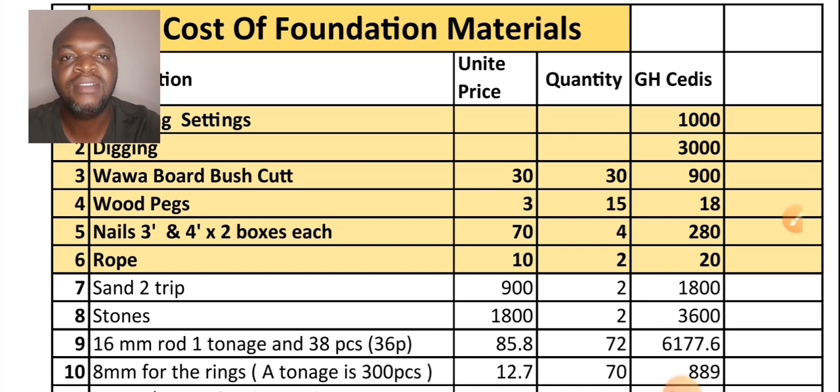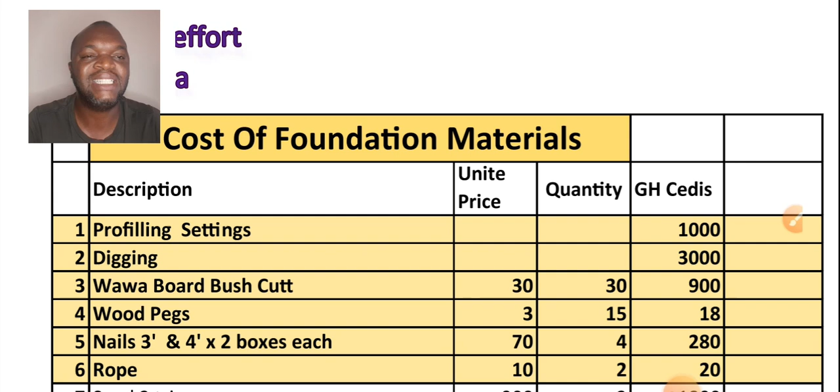In this episode, I want to guide all of us based on my last video, which I talked about the cost of foundation of a 5-bedroom house. So some of my subscribers have asked me to put it on a spreadsheet, and I did this particular one for a subscriber.

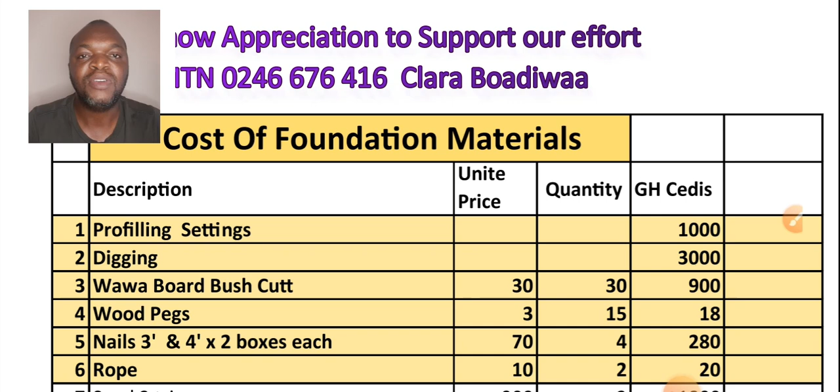So I want to share it with all of us so that if you want to build a 4-bedroom house or a 3-bedroom house or a 5-bedroom house, you can use this as a guide. Our aim is to reduce to the lowest value.

You don't just give the money as, okay, someone gives you an estimate, you say, oh let me pay. No, you have to bargain. So this is going to be our guide.

I designed this basically for a 5-bedroom house. In this 5-bedroom house, he has a big hall, a visitor's toilet, a guest room. The guest room has its own bathroom, which is all en suite. He has a kitchen, a kitchen store, and a laundry room.

And then the 4 bedrooms in addition come with their own bathroom. The master bedroom has a walk-in closet and then the shower separately. So the foundation is huge.

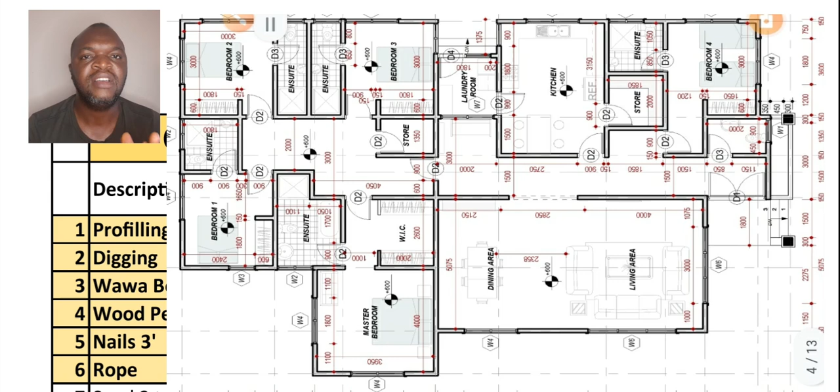In this way, we are using 2,000 blocks mostly for this foundation. Averagely, we use 1,500 to 1,700 for a standard 4-bedroom, 5-bedroom house. But when you have this laundry room, utility area, walk-in closets, and all the rooms having their own bathrooms, approximately 2,000 to 2,200 blocks will be required for such a foundation.

This also depends on how high you want to raise your structure. So here I'm staying with 2,000 blocks, depending on what the mason is doing at the site. Based on that you can add maybe 200 or 50 blocks depending on how high you want to go.

So this spreadsheet should guide all of us. Please let's go ahead and use it whenever we want to build. So this is solely for the foundation.

In this foundation we have our profiling settings. This is when the draftsman who did the drawing for you comes and demarcates all the rooms onto the land. By so doing, we get our Wawa board across the whole plot, which I showed in my last video.

Okay, yes, most people use blocks. They don't buy the Wawa boards and the pegs, but then it doesn't give accuracy, in my opinion. They use the blocks all around. They mark it with chalk, then put nails. They hit it with the nails and then put the rope on top.

But what happens if someone comes to pick the blocks away? You don't get your grid line. Grid lines are very, very important. It gives you the straightness of the building. From each grid line is about the wall, maybe the hall, the kitchen, the bathroom. They should all be straight, you understand?

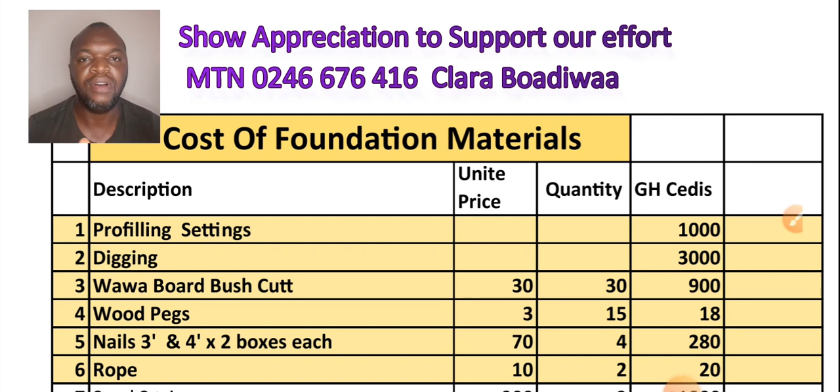So item number 4, which is the wood pegs. Then item number 5, which is the nails. Nails, we have 3 inches and 4 inches. We are buying 2 boxes each. And the cost is 70 Ghana cedis. That I can rest assured is okay, the prices are the same.

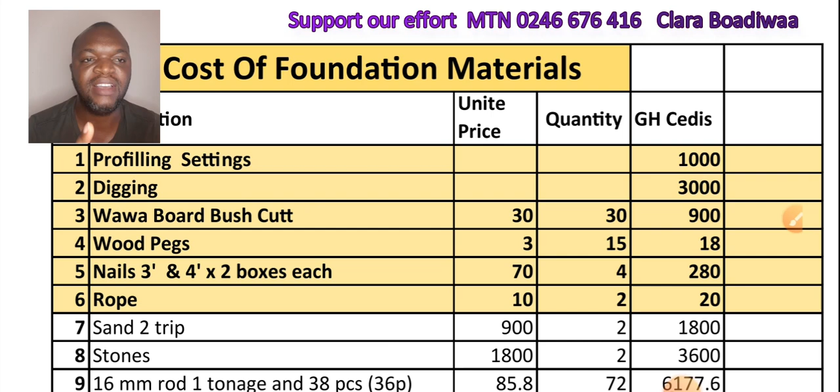Now you don't have to buy any other nails when you buy these 2 nails. Don't buy extra nails. And then you need rope.

We use rope to draw the grid line from one end to the other in order to get the straightness. Once we get the straightness, we pour a whitish powder onto the ground to demarcate all the rooms and the halls. We can use a whitewash, or we can use tiling cement, which is in a white powdered form.

Some people use sand, but sometimes you don't see it clearly. Some people use pickers for drawing the marks, because buying the tiling cement is also an additional cost. So while they draw the grid line, they can use the pickers to draw the lines and demarcate everything, and then you're good to go.

Now, from item 1 to 6, we are estimating around 5,000. We shouldn't go more than that. That should be our target. Always remember, we are trying to reduce costs. So yours is to bargain.

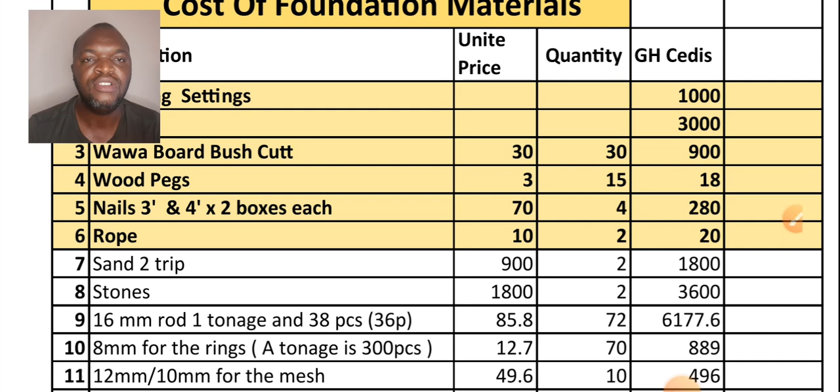In terms of the digging, when they come and say digging is 4,000, yours is to bargain, depending on how hard or soft the ground is. As I've indicated on item 2, digging should be 3,000. Some people will charge 2,500, some will charge 4,000, so item 2 you should be very careful how you bargain.

Item 1, the profiling setting, as I mentioned, you should be very vigilant. The person doing the profiling should be very well experienced. You just don't need anybody, if not your house will be crooked.

Position your house in a way that you have enough plot at the front. You can shift it to the left or right corner of the plot if it's a 70 by 100 plot. Position it such that you have enough plot. If you want a small backyard, you can leave about 4 feet at the back for a small backyard where you can place your poly tank.

You can have an out-kitchen where you cook smoky food before bringing them to the main kitchen, and a small garden if you want. Then you have ample space at the front for your flowers, your carport, and a pergola if you want. So make sure positioning of your house is very, very important.

So we're done with item 1 up to 6, which our estimate should be around 5,000. Should it go a little bit above that, you have to determine that price.

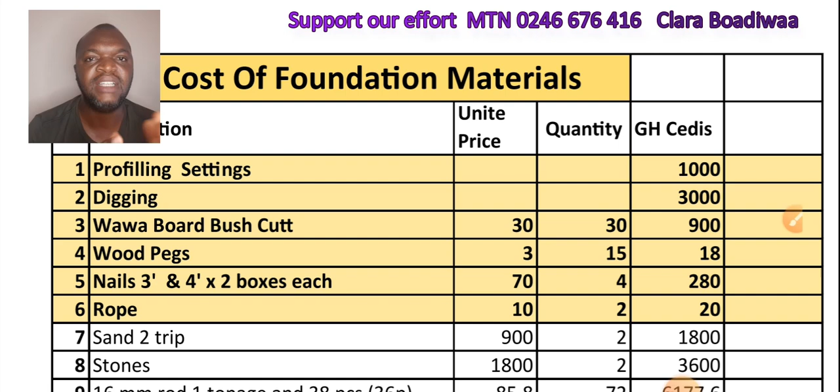Now from item 7, we need 2 trips of sand. It is very crucial. You can buy them in stages, but buying 2 trips of sand will not cause you any harm. Some people want to buy it one step at a time, but the 2 trips of sand will do justice for the foundation, because for the footing, block work, casting of the concrete pillars, and oversite concrete, you need a lot of sand.

And the stones as well, 2 trips will do entirely that. This is for a 5-bedroom house. This spreadsheet is designed for a 5-bedroom house, so if you have a 4-bedroom house, you are good to go. So item 8, we finished that.

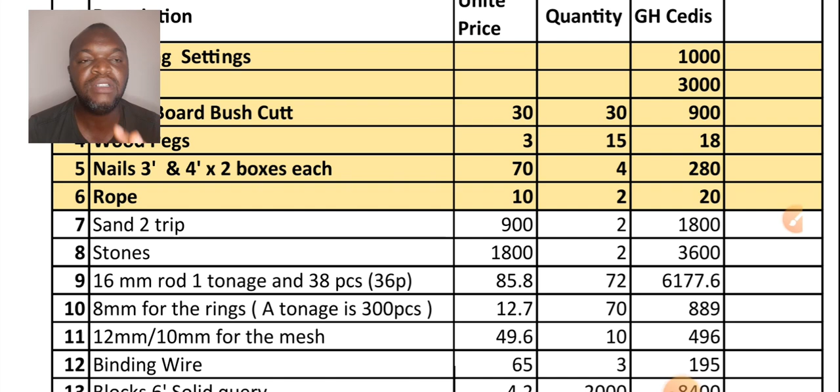Sand on item 7, some people say in their area they usually buy sand at 1,500 or 1,200, but I found that to be extravagant. That's a lot of money to buy sand at 1,500. That will make your estimate go high, but yours is to bargain to the lowest value.

Item 9, here we have 16mm rod. Based on Mr. Paul Amo's estimate or foundation plan, he has 36 pillars. So for these 36 pillars, I estimate, like I showed in my last video, we're going to take 2 full rods and cut them into 3.

And 1 full rod, when stretched wide, gives us 30 feet. So in these 30 feet, we're going to cut them into 3, giving us 10 feet, 10 feet, and 10 feet.

So you're going to be 10 feet high by 3. We need 2 of the rods, so we're going to have a total of 2 full rods cut into 3, which is 6 pieces, 10 feet high. Are you getting the point?

Yes. So based on that, I multiplied 36 by 2 - that 2 means 2 full rod. If 2 full rod gives me 1 pillar, that is the equation: 2 full rod constitute to 1 pillar.

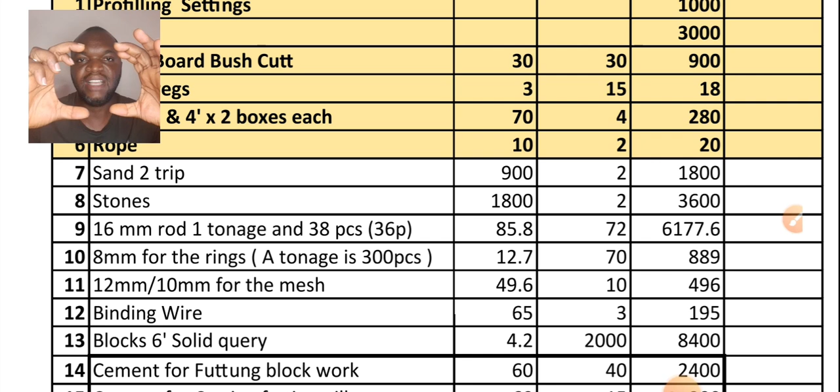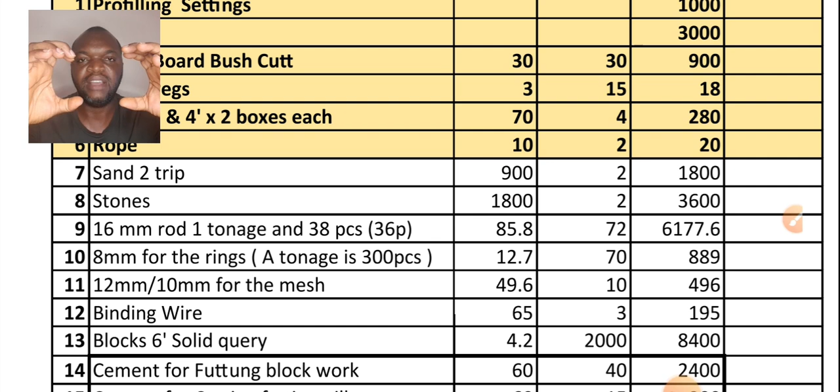Because 1 pillar I will have 10 feet - 1, 2, 3 - another 10 feet - 1, 2, 3 - which makes a stirrup. We call it a stirrup, or a ring. The ring will look like this, and I'll have 1, 2, 3 iron rods - one at the edge, in the middle, and at the edge. So the rings will look like this, with 3 rods here and 3 rods here. That gives you the stirrup.

So we need 2 full rods, one cut into 3, another cut into 3 - that gives me 1 pillar. Therefore, 36 pillars will constitute how many pieces of rods? I multiply 2 full rod by 36 pillars, and that gives me 72. So I need 72 pieces of 16mm rod.

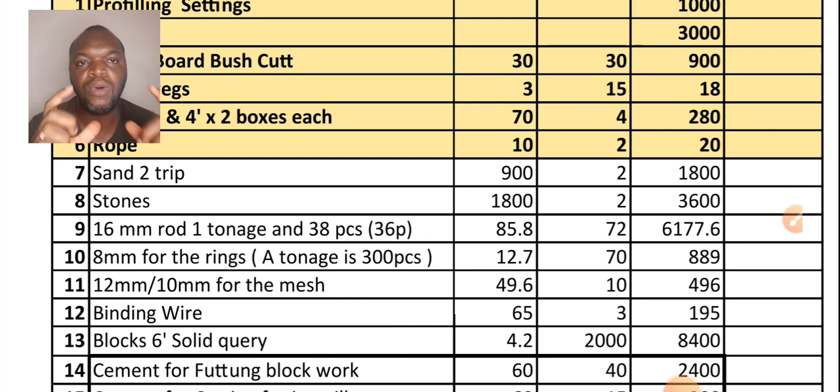We have 8mm, which we use for the rings - that's what holds those 16mm together, so that is a ring. We can buy about 70 pieces, because a ton is going about 300 pieces, so we need 70 pieces for that.

12mm for the mesh - here we are buying 10 pieces. You can buy a little bit more for your ground beams; your steel bender will tell you about that.

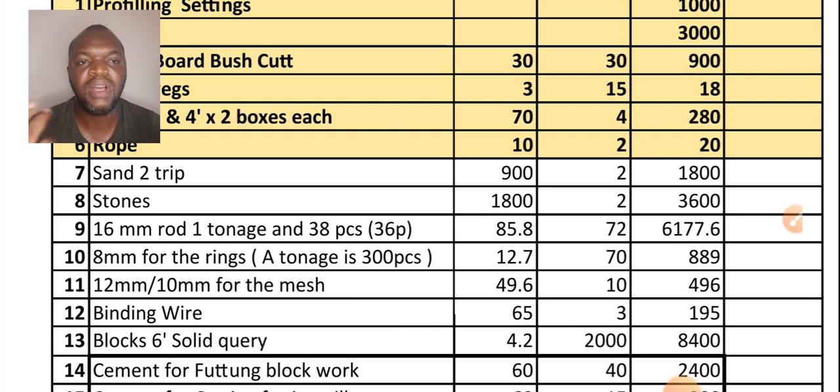And then binding wire - we need 3 binding wires. One is going for 65, that I know for sure. I just bought one recently.

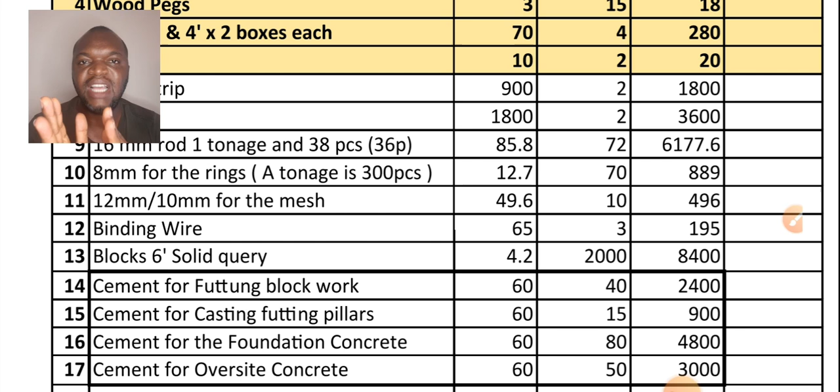Item number 13 is the blocks. We need 6 inches solid quarry dust block - complete 6 inches, make sure you get the rightful size. Recent time, machines are reducing the size of the block, so make sure you get the right size - we need 6 inches solid.

Your aim is to get the lowest price. If you get it at 5 cedis, your estimate will blow out; if you get it at 4 cedis, that's good. I am buying mine at 4 cedis 20 pesewas at Kasoa - that's where I bought mine from DMK, I will share that with you. So 4 cedis 20 pesewas for the block. We need 2,000 blocks.

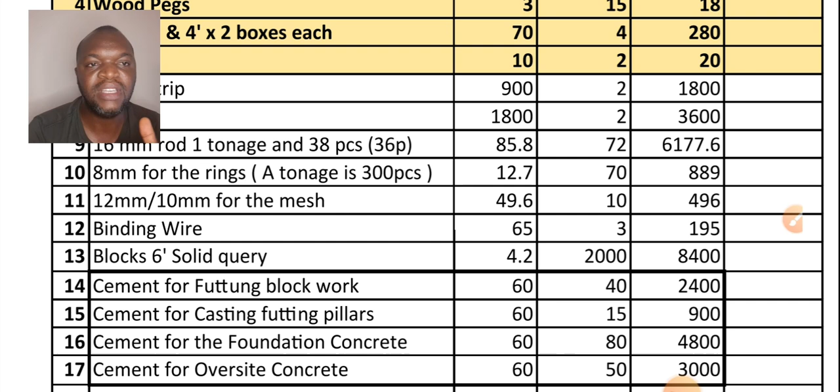That gives me 8,400. Then we need cement, which is item 14 - cement for footing block work. Last time I showed you that 100 blocks constitute to 2 bags of cement. Therefore, if I'm using 2,000 blocks, that's 2,000 blocks multiplied by 2, divided by 100, which gives me 40 bags of cement.

Ghacem cement is going for 60. I usually buy diamond cement - diamond cement is 54. I buy diamond cement; they are all cement, the category are the same, so you can buy the other ones. For plastering, you can go for the Ghacem, because that one is also stronger, which is 42.5 R. Yours is to make sure foundation is solid while also reducing cost.

So item 14 we are done. Item 15, cement for casting the footing pillars - we need 15 bags, we don't need that much. Item 16, we need cement for the foundation concrete - quantity, I decided to put 80 bags for safety.

Then we come to cement for oversite concrete - also I put 50 bags. Now if you put this category together where I have bolded, that's item 14 up to item 17.

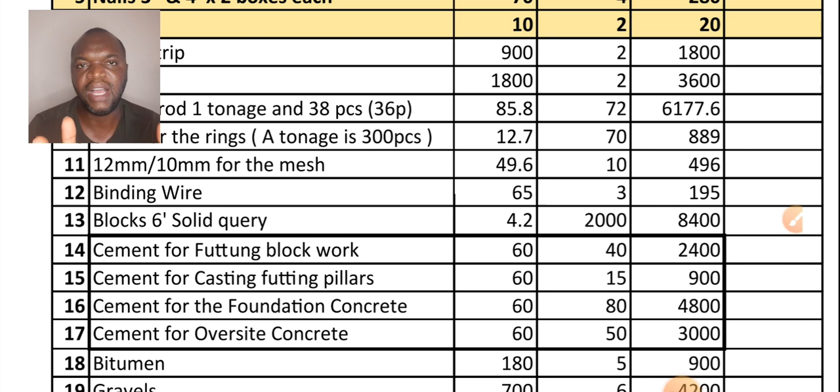150 bags, and then let them begin with that. Once it gets to the middle and you realize that you need more, you can add more, or you can even buy 100 bags from the start, let them start with that, so that later on you can add. You don't just buy all because they gave you, oh my 200 bags, and then you buy the whole 200 bags. Buy 100 bags, let them begin the work, and then see where it takes them, and then you can add more. You understand? So this is my estimation, based on analysis.

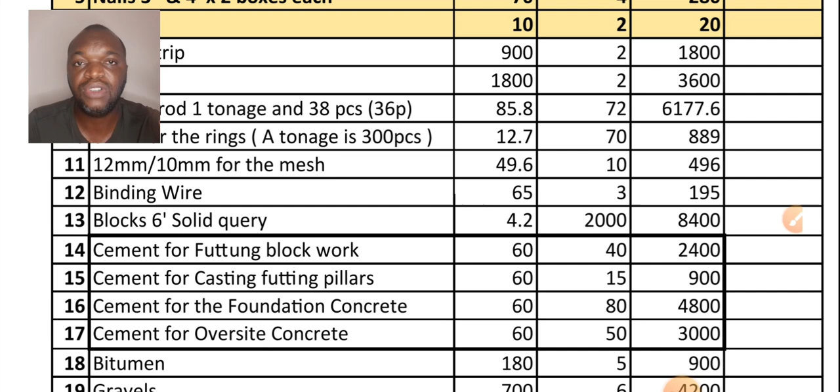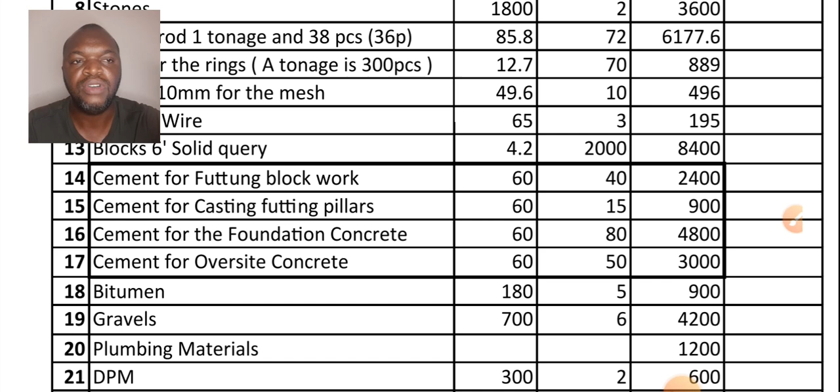And then we moved on to item 18. Item 18 is the bitumen, which is a waterproof coating. It's going for 180 Ghana cedis per gallon or per bucket. You can go to Opera, get a variety of them, and choose the one that you want. The higher the price, the higher your estimate. That is dependent upon you. You have to bargain to the lowest value.

Item 19 is the gravels or laterite. Based on your location as well, some people get it at 400 Ghana cedis per 22 cubic of a truck. Some people get it at 600, some people get it at 700, some people even get it at 1,000. So depending on the depth of your foundation, and that's why most people don't want to raise their foundation, because once they raise their foundation, they're going to get more laterite, meaning more money will be going.

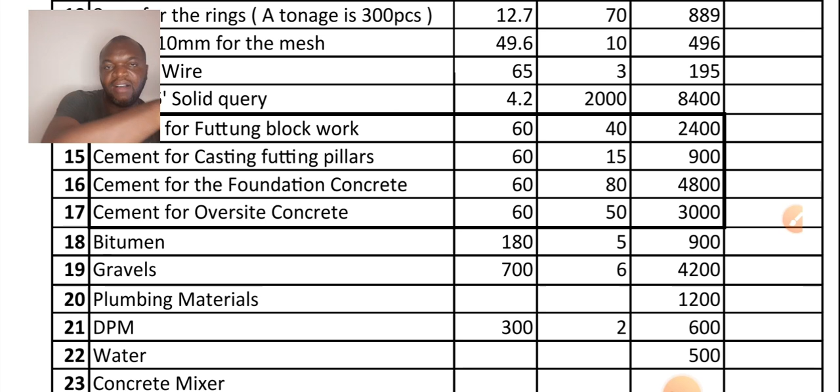So depending on the slope of your land, your mason should be able to create a step, so that you don't buy more gravels or laterite. The mason should be very good, so that when the land is not level, and some places are lower and some places are higher, the lower places will take more blocks in order to cover for the areas that are on the hilly side.

So he needs to be able to balance it, because the hilly side will have lower blocks while the lower side will have higher blocks. So you need to balance that equation. It is always good to have a level land, and then you're at peace. If you're on a hilly top, that's good, because you're not affected by rain, so you don't have to raise it that high. Are you getting the point?

Yeah, so gravels is item 19. Item 20, we have plumbing materials. Plumbing materials, I decided to put 1,200 because a 5-bedroom house, all the bedrooms will have their piping system, and then the kitchen, the laundry, and the visitor's toilet and the guest room toilet. All these piping work should not exceed more than 1,200 for the cost of the material.

Here we are not buying pressure pipe. If you want to buy a pressure pipe, it will take you up to 3,000 or even 4,000. You can buy Interplast or Duraplast, they are equally good, that's what people have been using throughout. We only use pressure pipe when you're doing the decking, because of the wheelbarrows going up and down, the metals, all those movements. You need a pressure pipe in the decking system.

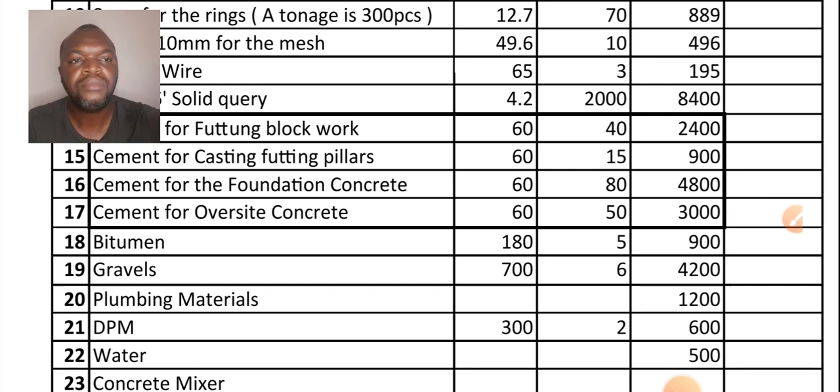Okay, so we go to item 21. Item 21 is the DPM, the dampproof membrane. As at the time I bought mine at 300 Ghana cedis per roll. It's very thick in the roll, the black rubber.

So if you want to laminate after your gravels have been poured in, you have to rent a compactor. If you don't rent a compactor, you can leave it for the rains to pour on it, and then it will settle down. Once it's settled down, they can ram it or rent a compactor at that time. Let them compact it nicely, and then you put item 21 on it, which is the DPM, the black rubber, on the surface, and then the plumber will do his plumbing work, and then the mason will cast the concrete on the entire surface, which is called the oversite concrete.

Okay, so we move to item 22. Item 22 is water.

We need water at every step of the way, so I put 500 Ghana cedis. When those trucks bring about 1,000 or 2,000 liters, you need to have a tank at your site for that. Your mason can create a temporary tank for you with blocks.

You need extra blocks for that, and about 2 to 3 bags of cement. Then item 23 is the concrete mixer. Mostly I don't need a concrete mixer at the beginning of my project, especially for foundation work. I'd rather ask the mason to create a platform using 2 bags of cement, a very big, nice platform where we can mix our mortar and concrete, so we don't mix directly on the ground. It is not good, not hygienic, not safe, and it doesn't help the cement mixture. You understand?

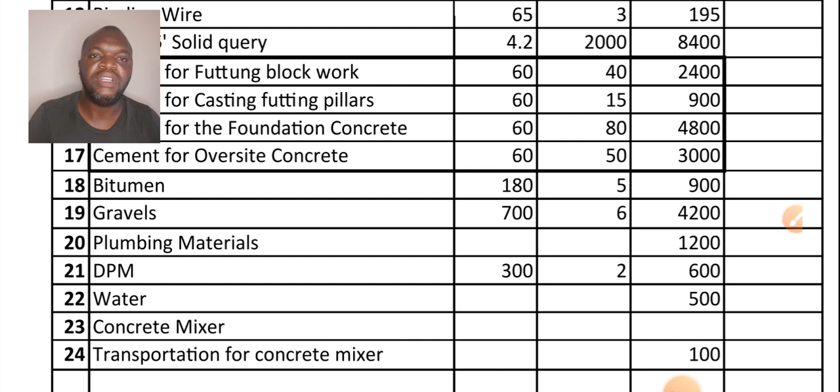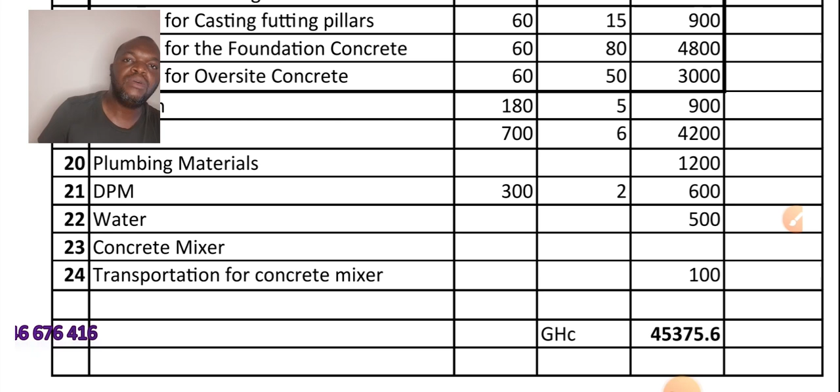Okay, so item 23, we are done. Then item 24 is the transportation for the concrete mixer. The concrete mixer will not come to the site by itself, it needs to be hooked up to a vehicle that will pull it to the site. That is also an additional cost to your estimate.

Like I said, there are many ways to reduce costs, and I'm only guiding you through. So as of now, from item 1 to 24, our total estimate is 45,375 Ghana cedis, 60 pesewas.

I have not included item 23, the concrete mixer price. Some people charge 600. I don't know the current price as of now, so I don't want to put a price there, you will decide whether you need it or not. For me, I don't need it, so it will rule out of my equation and reduce the cost. Likewise, if I rule that out, item 24, the transportation, is also ruled out, and my cost will reduce further. Definitely, if you're building in a waterlogged area, you need item 21, the DPM.

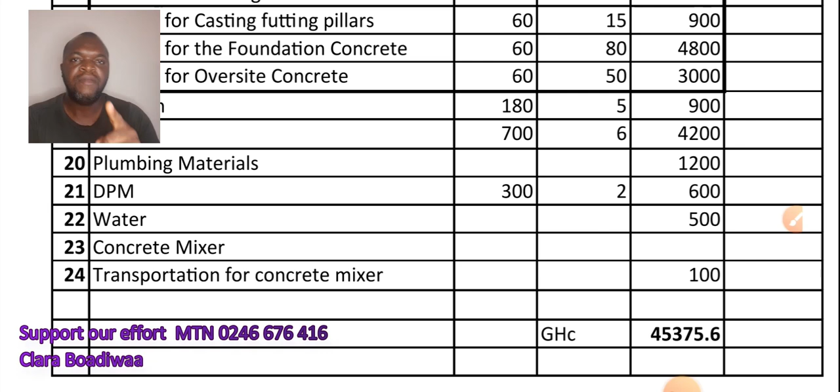And in that case, for item 18, which is the bitumen on the foundation, a new method is that people buy 42.5R cement, add some chemical, and do plastering on the footing block work before covering the edges with sand, instead of doing the painting. That is also another method.

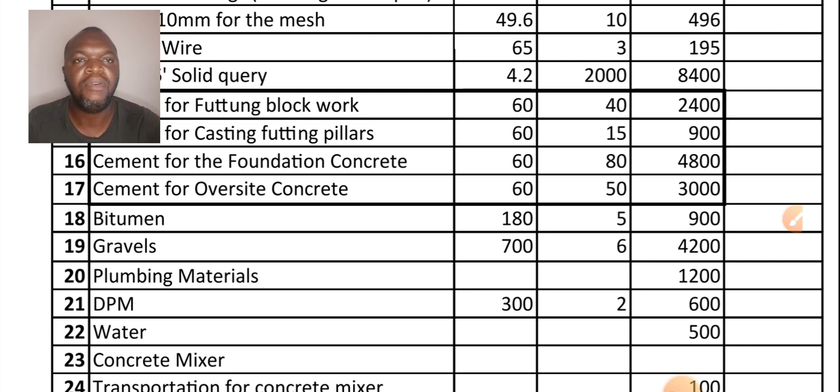It means extra bags of cement will go into that area, as compared to buying 5 pieces of bitumen, which would cost you 900. You can buy 5 bags of cement and it can do that plastering for you, and again you have reduced cost in that area. Are you getting the point? So as of now, we are done with our estimate for the cost of materials for a 5-bedroom house.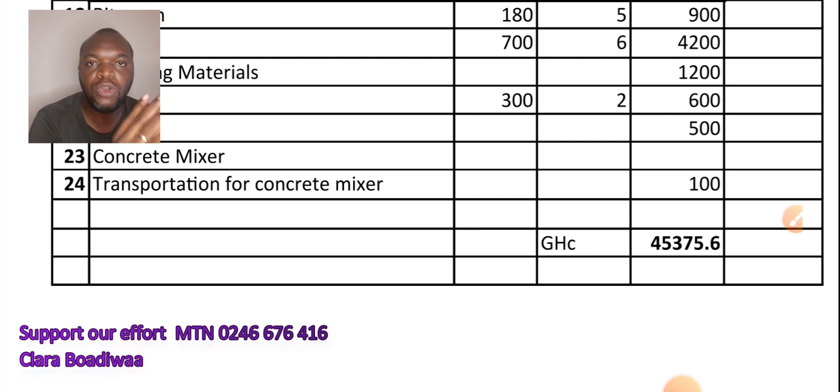This is a standard 5-bedroom house, which I mentioned. We have the hall, we have a corridor, we have a porch, which is the main porch. There might be some pillars shooting up, long pillars. Okay, fine. We have the visitor's toilet. This is just a toilet, not a washroom, just a toilet.

And then we come to the guest room itself. The guest room will have the toilet, everything within. That's the guest room. And then we have a big kitchen. I love big kitchens, a kitchen with an island.

And then the kitchen has a store. Are you getting it? There's a store. And then we have a laundry room. Yes, don't put your washing machine in your kitchen. I made mention of that in my last episode.

Someone said, oh, in London we do that, but in Ghana, do we do that? You see, sometimes we learn ignorantly. London, they do certain things because they want to reduce space size for certain income earning people. You understand? The rich do not put a washing machine in their kitchen. They reduce some houses, they build townhouses for low income earning people. So they try to minimize certain things. That doesn't mean you should copy the same thing and bring it back to Ghana.

You design your house. You are designing it, not a real estate person. So you design it the way you want it. And I will not put my washing machine in my kitchen. It doesn't make sense. So I should have a laundry room where the washing machine should be. You understand? So that's it.

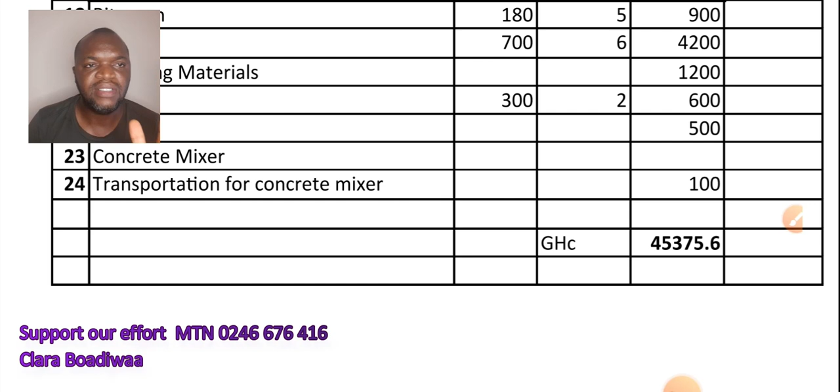So as of now, we've spent 45,375. This is only the cost of materials. All right, so let's go to the workmanship.

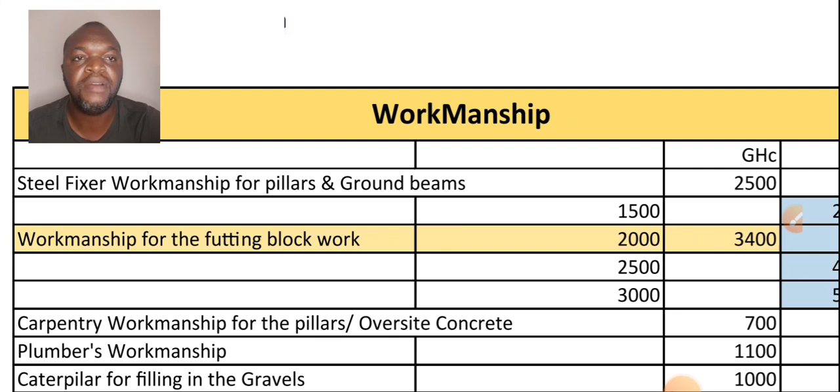So here we are on workmanship. Workmanship is very, very important. So we're going to work our way out throughout to the workmanship.

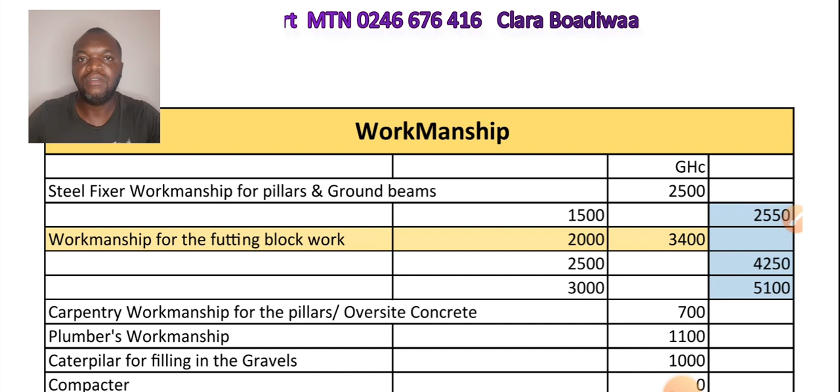So workmanship here, I need steel fixer workmanship for the pillars and the ground beams. The pillars, which the steel bender is going to cut the iron rods into 3, giving me 6 stirrups for each pillar. So we have 36 pillars. For Mr. Paul Amo, your total pillars is 36.

So once that is done, and they pour in the laterite, they're going to put an iron rod on the edge of all the blocks. This will help from cracking when the building is settling down.

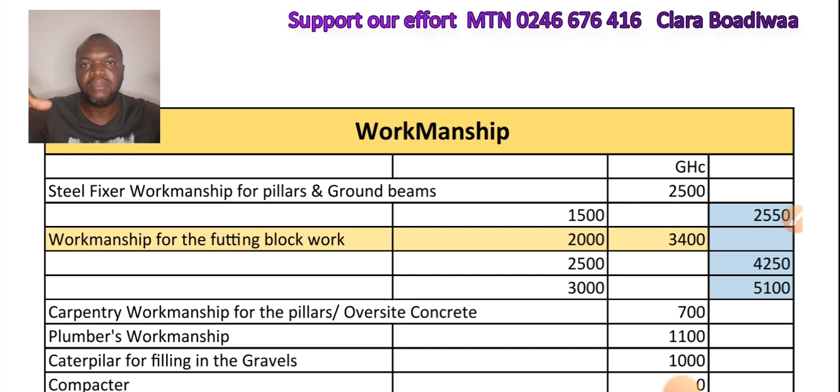So if the steel bender is going to do all of that, per my analysis, he's going to charge you 2,500. Your aim is to reduce this cost to approximately 2,000, that will be okay. Or even if 1,800, it is up to you to bargain with the steel bender. They will always quote higher prices.

Okay, here you can call on my steel bender. Yes, Master Isaac Gomado is ready to help you with that steel bending work. Our goal is to help people with reasonable prices, not cheap, reasonable prices. So steel benders work for your 5-bedroom house, workmanship should be 2,500 at a reducing rate.

Now we are into banking terms. Here we are estimating workmanship for the footing block work. We say we are using 2,000 blocks. So if we are using 2,000 blocks, what is the workmanship? Based on the estimate, 2,000 blocks will constitute a workmanship of 3,400.

If you send me your email, I have to send you a spreadsheet, and you'll be able to manipulate it. If it's 2,200, you just key it in and then the price will come.

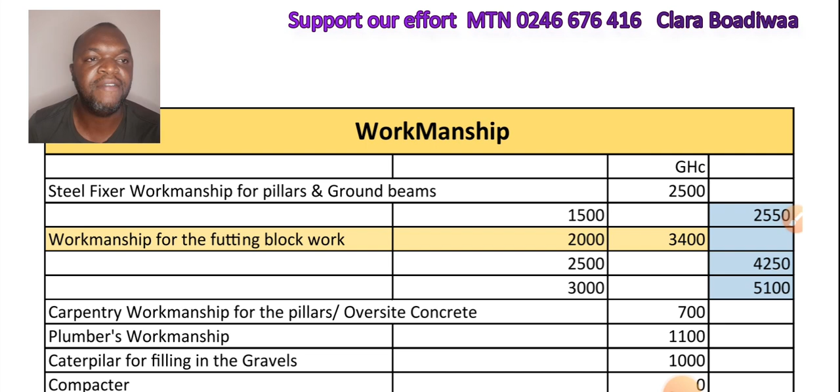So we are using 2,000 blocks, and the workmanship for that is 3,400. In case you want to use 1,500 blocks, the workmanship should be 2,550. In case you're using 2,500 blocks, the workmanship should be 4,250. In case you are using 3,000 blocks, the workmanship will be 5,100.

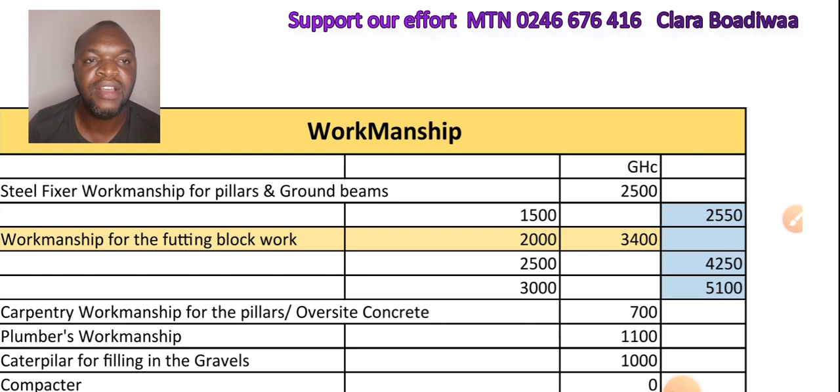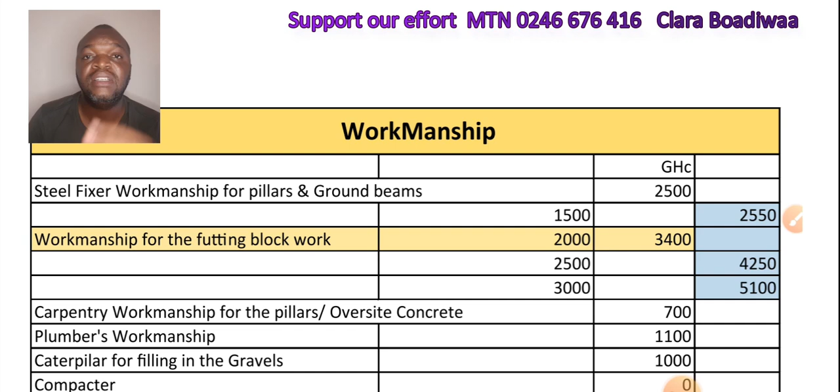As of now, we are on 2,000 blocks for Mr. Paul Amo's foundation, so he's going to pay the mason 3,400. He could say, based on this, let me pay the mason 4,000. That is at his own discretion, so that it will cushion the mason to do very diligent, extra care. Sometimes you have to cushion them a little bit - you can say let me pay him 3,600 or 3,700. It is up to Mr. Paul Amo to decide. But solely, the cost of 2,000 blocks is going for 3,400. There's nothing wrong about it.

Now we move on to carpentry work. The carpentry workmanship for the pillars and for the oversite concrete - we'll put the wawa board we bought for the profiling, the 30 pieces of board, along the edges of the whole footing block work, and then cast the concrete in the middle. That's what we call the fascia - those boards go around like the fascia. So we are not buying any wawa board anymore, and we are not buying nails anymore. The carpenter is going to use this one, and the cost of the carpenter work should not be more than 700 Ghana cedis for the pillars and the oversite concrete.

The plumber will charge you 1,100 based on distance - he might add transportation. If it's very short, I guess you can still bargain with him to somewhere around 1,000, for the plumbing works. And believe you me, Mr. Paul Amo doesn't have to buy any materials anymore, because he bought the plumbing materials earlier in the material estimate. This is just the workmanship.

So once everything is done and the roofing is completed, then we go to the piping work, which is also a different estimate that will come later on.

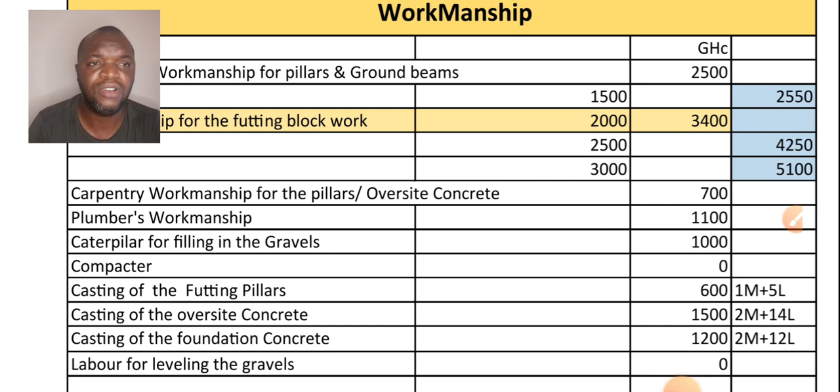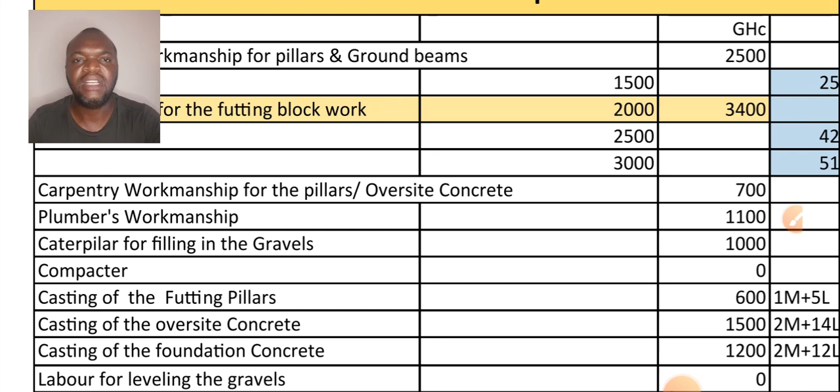It should be much closer. Okay, compactor - in case you want to rent a compactor, that's also another cost. In my case, you could see I left that portion - I didn't do anything to the compactor, I didn't give any price. It is up to you to rent a compactor. I don't want to increase my budget - I want rain to pour on it, and as the masons and laborers work on top of it, it will compact and sink by itself. But in case you need a compactor, you can still get one. I don't know the price, so I left it blank.

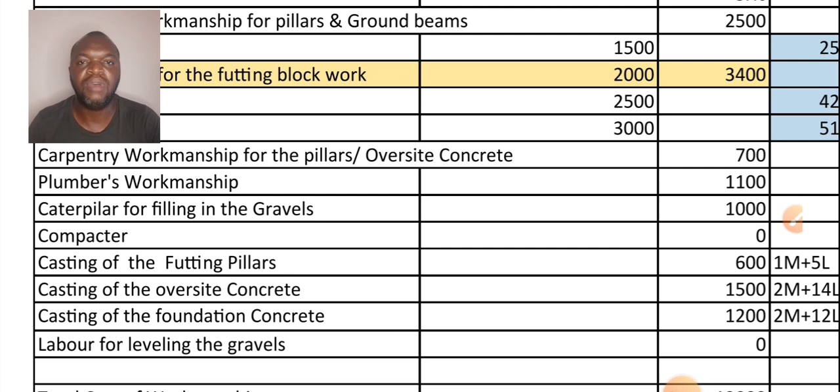Then casting of the footings pillars. Now the masons have laid the 2,000 blocks, they need to cast the pillars. After the carpenter has done his board covering all the pillars, the masons have to cast that one. So for casting of the footing pillars, I put 600 - because in casting of the pillars, I need 1 mason and 5 laborers. If you look at the far right, I put 1M plus 5L.

5L means laborers, okay? So 1 mason and 5 laborers. 5 laborers in the extent that 2 laborers will be mixing, and then the other 3 will be carrying and giving it to the mason to pour into the pillars. Are you getting it? Yes, so we don't need too much of that.

And the mason will take 90, and the laborers will take 80. So 80 multiplied by 5, I think it's around 400, plus that of the mason should give me around 500 and something. I just run it up to 600. Are you getting it? I just run it up to 600, and I think it's reasonable.

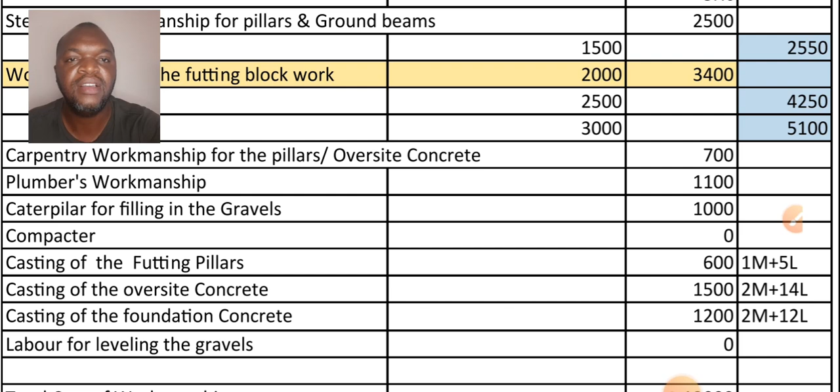Okay, all right. And then we go to casting of the oversite concrete. So after the pillars have been casted, the laterite poured in, caterpillar has come and done that. You rent a compactor to compact the entire surface for you. Then the plumber will come and do his work. You put the DPM, which is the black rubber, on top.

Now the masons will have to cast the entire surface with concrete, and that is what we call the oversite concrete. And casting that concrete, I'm putting 1,500. In this case, I need 2 masons, plus 14 laborers. Here you might rent a concrete mixer.

If not a concrete mixer and you still want to do it on a platform on the ground, you can still do that in order to reduce cost. But you still need 2 masons plus 14 laborers. This requires a lot of extra force. All right, so that is it. You can try to reduce the laborers and make it 10 laborers, 2 masons.

Yes, 10 laborers because you reduce it by 4. 10 laborers, you're going to have 2 laborers - after all of them have fetched the sand, the cement and the stones and poured it on the platform, one person will be fetching water, two people will be mixing, and the rest will be moving up and down. So 3 people at the concrete mixer area, 7 people moving up and down.

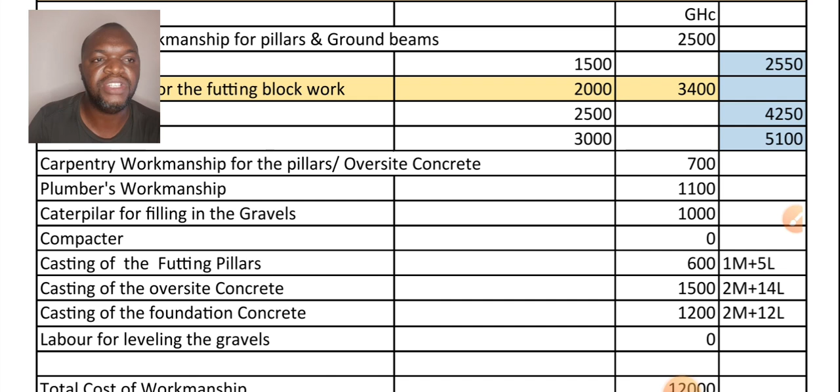All right, then we move on to casting of the foundation concrete. Yes, so foundation concrete, I think I should have arranged that systematically, but nonetheless, that's okay. So casting of the foundation concrete, we need 1,200. We need 2 masons plus 12 laborers for that one as well.

All right, and then labor for leveling the gravels. When the caterpillar pours in all the gravels, it will not be able to level from the middle to the edge and all of that. You will still need human effort to do the leveling. So for that I didn't put any price. It will depend on how you negotiate with the boys, whether you want to give them 300, 400 or 500 just to level the entire surface. That is up to you. That's labor for leveling the gravels.

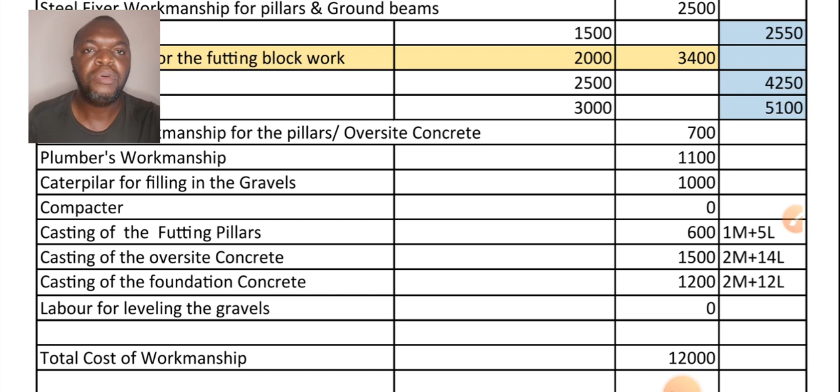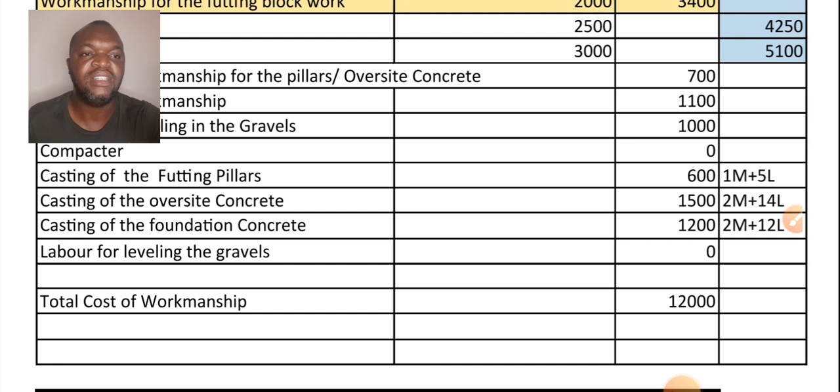Okay, so putting all together, from the top to the down, the total cost of workmanship for a 5-bedroom house is 12,000 Ghana cedis. All right, vis-a-vis the inflation and whatsoever, based on the analysis we've done right now, 12,000 will be the workmanship for a 5-bedroom house. We can say it's the same for a 4-bedroom house, depending on what goes into it. You can reduce the cost a little bit because this is a 5-bedroom house. The workmanship - carpenter, plumber, mason, laborers, the caterpillar and all of that - is 12,000 Ghana cedis.

Okay, now putting them together, cost of materials, we have 45,375. The workmanship is 12,000, giving us a total of 57,375 Ghana cedis. Okay, then I decided to put miscellaneous.

Miscellaneous will be that perhaps those who are coming to the site for the digging might not have their pickaxe, but it is always necessary for them to have their pickaxe and shovel. But if they don't have enough, you might want to buy extra, and then make sure you write your name on it because they will definitely take it away.

That is why it is required that they should come with their own pickaxe and shovel, because they will always steal yours and you will never see them again. But then, if you need to buy 2 shovels, 2 pickaxes, we have the spade and then the loading shovel itself, you need to buy that too.

And then in case you want to buy a poly tank, you need to get one at the site. All of these I put as miscellaneous. So for the miscellaneous, I put 5,000. But in some cases, if you have some drums for the water and all of that, I think you'll be okay.

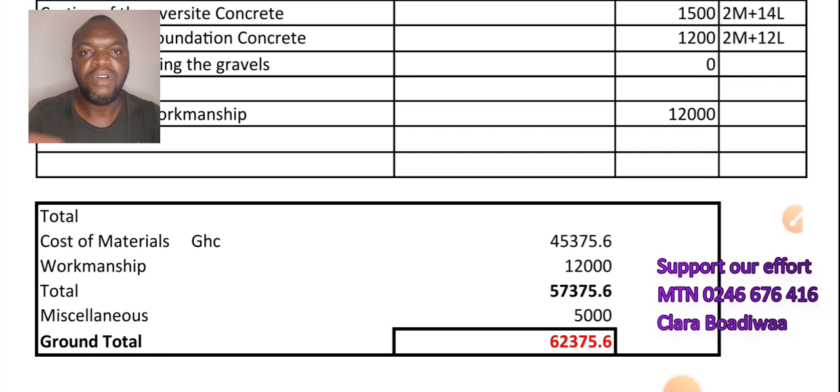So my analysis before said 60,000 is enough for your foundation work. This is a 5-bedroom house, and our expenditure here is 62,375, just because I added the miscellaneous. Now the miscellaneous can still cover some of the compactor cost, because I didn't put a price for the compactor. And the price for renting the concrete mixer also, I didn't put any price for that. Are you getting the point?

Yes, so this miscellaneous can also come in if the guy digging the trench wants to charge more than 3,000, say 3,500, you can still take some money from the miscellaneous and add to it. So all these add up, in case the mason says, try to add something a little to my workmanship so we can do a diligent job for you. Why not? It will all come through from the miscellaneous.

So as of now, our 5-bedroom house, the cost of foundation, mathematically, spiritually, wherever you want to go, this is 62,375 cedis. If I've missed something out, please drop me a comment and we can update that.